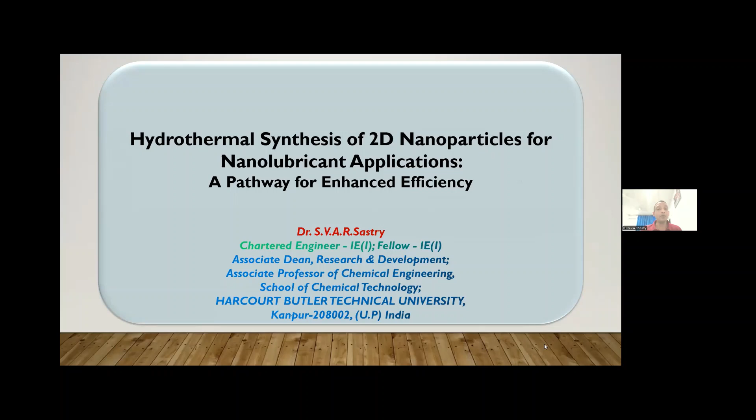So the topic of my presentation is hydrothermal synthesis of two-dimensional nanoparticles for nanolubricant applications, a pathway for enhanced efficiency. So why nanolubricants at all?

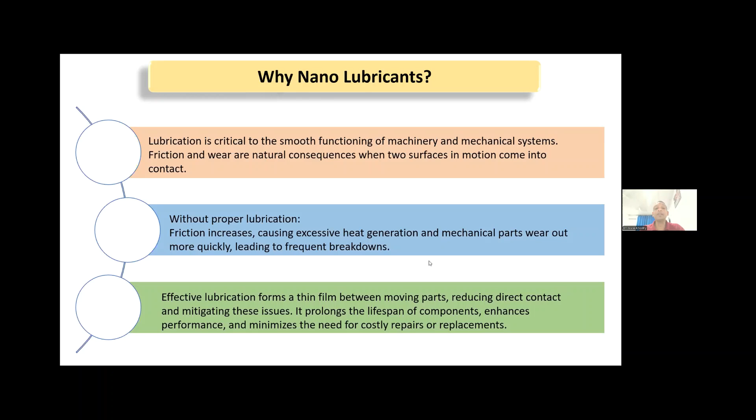Lubrication is critical to the smooth functioning of machinery and mechanical systems. Friction and wear are natural consequences when two surfaces in motion come in contact. Without proper lubrication, friction increases, causing excessive heat generation, and mechanical parts wear out more quickly, causing breakdowns. Effective lubrication forms a thin film that prolongs the lifespan of the components.

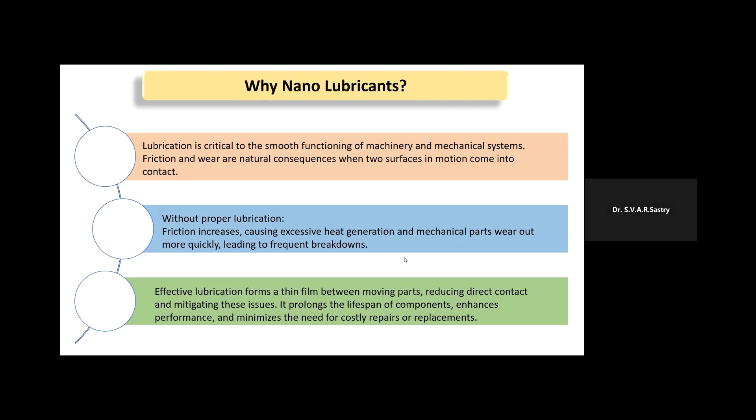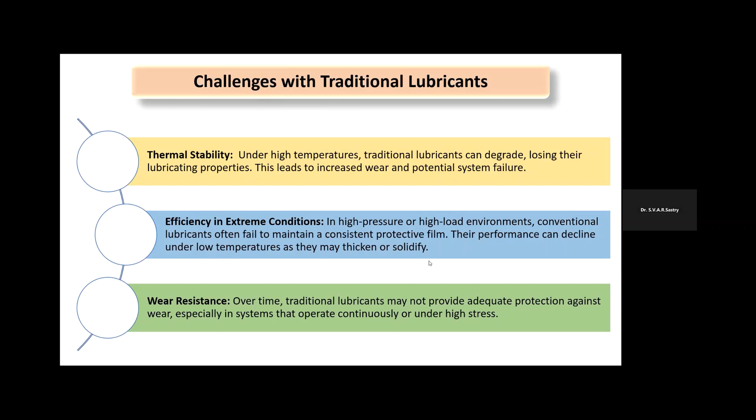The third challenge is wear resistance. It is seen that over time, traditional lubricants may not provide adequate protection against wear, especially in systems that operate continuously under high stress.

To overcome these limitations and challenges, we can have nanolubricants, which is a next generation lubrication technology. We can have enhanced thermal stability because nanoparticles present in the lubricants can withstand higher temperatures without degrading, maintaining the lubricant's performance in extreme heat. They can also dissipate heat more effectively, reducing the risk of overheating in the engine.

They also have superior anti-wear properties because they can create a protective layer on the surface, minimizing direct metal-to-metal contact, which reduces wear and prolongs the life of machine parts. The third advantage is friction reduction, wherein they act as tiny ball bearings, reducing friction between moving parts, leading to smoother operation and lower energy consumption.

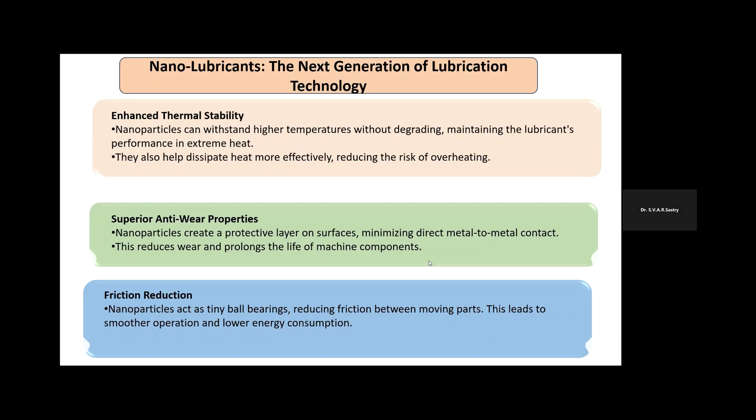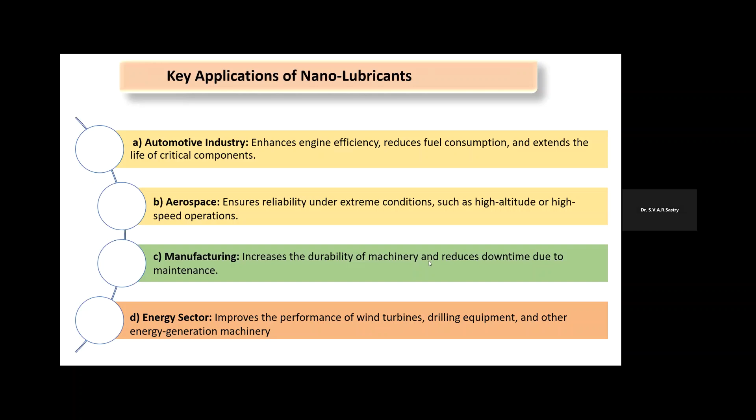Let's see the key applications of nanolubricants. It's seen that almost every industry, including the automobile industry, requires the use of nanolubricants for effective performance. So we have automotive, aerospace, manufacturing, energy sector, etc.

Let's see the comparison between conventional lubricants and nanolubricants, in terms of properties. First, thermal stability: conventional lubricants are moderate in thermal stability and degrade at higher temperatures, whereas nanolubricants have high thermal stability and are stable even at extreme temperatures.

Wear resistance is limited for conventional lubricants, whereas for nanolubricants it is superior. Friction reduction is adequate in conventional lubricants, whereas in nanolubricants it is excellent and also minimizes energy loss. In extreme conditions, efficiency declines for conventional lubricants, whereas nanolubricant efficiency is consistent in all conditions. The last property is environmental impact.

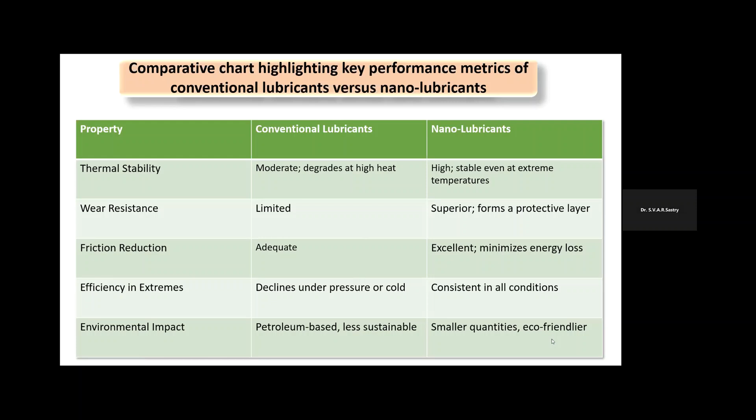Conventional lubricants, being based on petroleum-based feedstock, have a higher environmental impact and are less sustainable. Whereas nanolubricants can be used in lesser quantities and can also be made from biodegradable biological resources like castor oil and neem oil, which are non-edible oils, making them environmentally friendly. So how do we synthesize nanolubricants and add two-dimensional nanoparticles, and which method should we take into account?

Hydrothermal synthesis, or the hydrothermal method, for synthesizing nanoparticles is found to be the best method as of now, which can be used to make the nanoparticles, and then the nanoparticles can be added as additives in the lubricants. So to make the nanoparticles, we have these steps to be done.

First is precursor selection: we can select metal salts, either sulfates, nitrates, or oxides, used as precursors. Then we prepare a solution - the precursors are dissolved in water or a mixture of solvents, often under basic or acidic conditions, depending on the desired product. Then we seal it in an autoclave.

The solution is then transferred to a Teflon-lined autoclave and sealed. The autoclave ensures a pressurized environment, typically at a temperature between 120 degrees Celsius to 250 degrees Celsius.

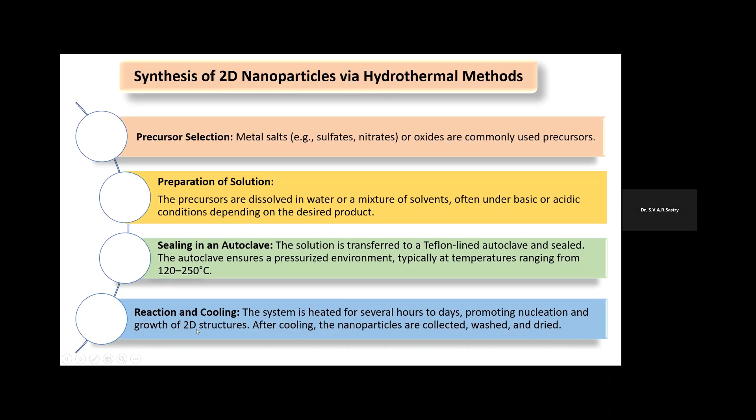Then the next step is reaction and cooling. The system is heated for several hours or several days, depending on the type of nanoparticles to be made, promoting nucleation and growth of two-dimensional nanoparticles in the autoclave. After cooling, the nanoparticles are collected, washed, and dried.

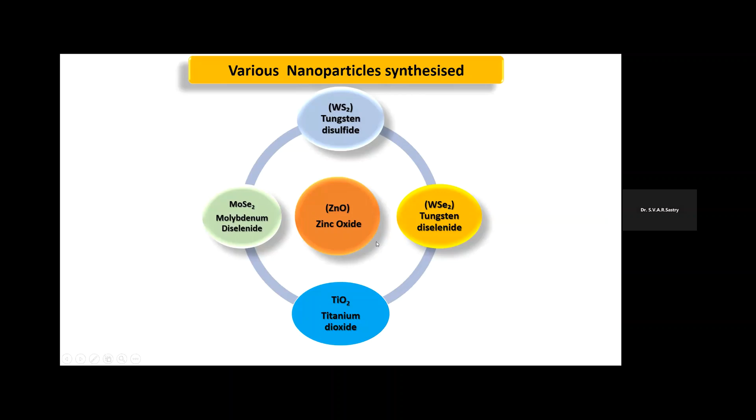We have made 5 different types of nanoparticles using this method, and all 5 are used in making nanolubricants. The first is titanium dioxide. Then we have molybdenum diselenide, tungsten disulfide, tungsten diselenide, and zinc oxide. All 5 have shown good performance in engines.

Let's see the hydrothermal synthesis method for synthesizing two-dimensional nanoparticles: preparation of precursors, then transferring to a Teflon-lined autoclave, then the autoclave is heated at a temperature between 100 to 250 or 300 degrees Celsius in a vacuum oven.

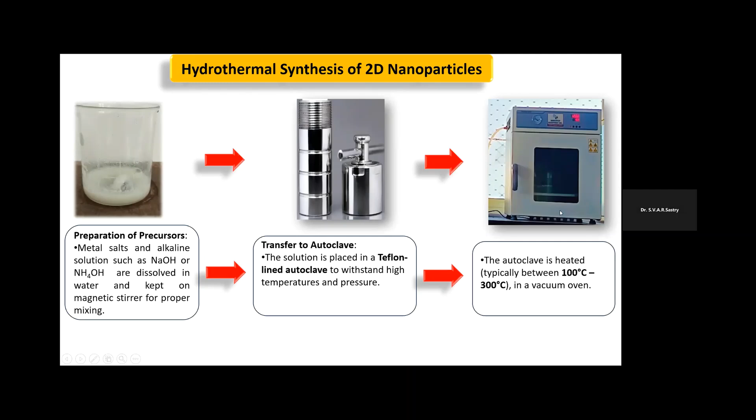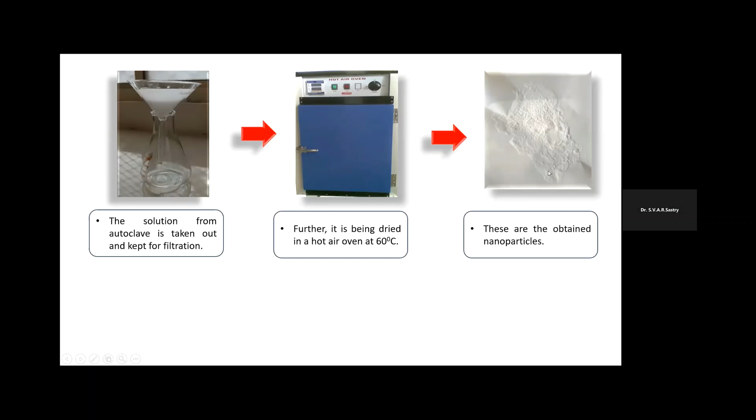Then the solution coming from that is transferred, kept for filtration. It is further dried in a hot air oven at 60 degrees Celsius. And then finally, we have this white powder obtained as nanoparticles. This is zinc oxide.

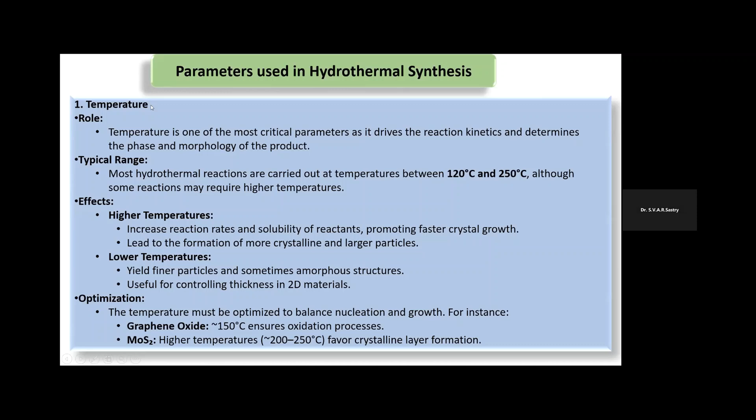So what are the parameters used to control the hydrothermal synthesis method? The first and most important parameter is temperature. It is one of the most critical parameters, driving the kinetics of the reaction and determining the phase and morphology of the product formed. The typical range is between 120 to 250 degrees Celsius, although some nanoparticle synthesis may require higher temperatures. Higher temperatures increase the reaction rates and the solubility of reactants, promoting faster crystal growth.

In the autoclave, higher temperature also leads to the formation of more crystalline and larger particles, whereas lower temperature gives finer particles and sometimes amorphous structures, useful for controlling thickness in two-dimensional materials. So higher temperatures give more crystalline materials, and lower temperatures give more amorphous materials. We have to optimize the temperature to balance nucleation and growth.

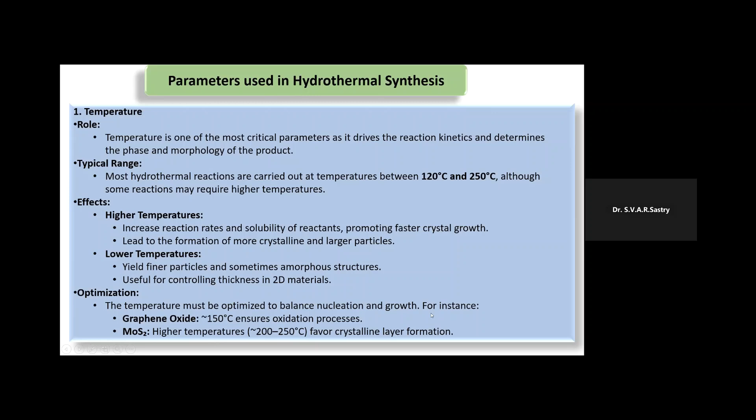For example, if you want to make graphene oxide nanoparticles, it is recommended to have a temperature of 150 degrees Celsius to ensure good oxidation. Similarly, if you want to use molybdenum disulfide, higher temperatures are required, between 200 to 250 Celsius, to have good crystalline layer formation.

The next parameter used in the hydrothermal synthesis mechanism is pressure. Pressure is typically auto-generated in the closed autoclave. It enables reactions at temperatures above the boiling point of the solvent, and the typical range of pressure is between 1 megapascal to 10 megapascals, depending on the solvent's vapor pressure at the reaction temperature.

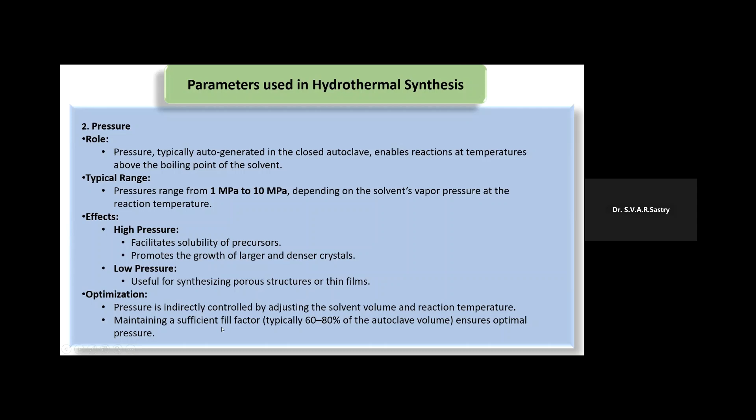The effects of pressure: high pressure facilitates the solubility of the precursors easily and promotes the growth of larger and denser crystals, whereas lower pressure is useful for synthesizing porous structures or thin films. Optimization is required again. Pressure is indirectly controlled by adjusting the solvent volume and the reaction temperature, maintaining a sufficient fill factor, typically between 60 to 80% of autoclave volume, to ensure optimal pressure.

The third parameter is reaction time. It dictates how long the reactants are subjected to the high temperature and high pressure environment. The typical range is between 6 to 72 hours, depending on the material we want to synthesize nanoparticles of. Long reaction time enables complete crystallization and the growth of larger nanoparticles, useful for production of defect-free structures.

Shorter reaction times give smaller particles or intermediate phases like clusters, favoring rapid nucleation over crystal growth, useful for size control as well. So again we had to optimize. It is observed that molybdenum disulfide nanosheets require around 24 hours, whereas zinc oxide nanocrystals can form within 6 to 12 hours. Depending on different types of materials, we have different optimal times.

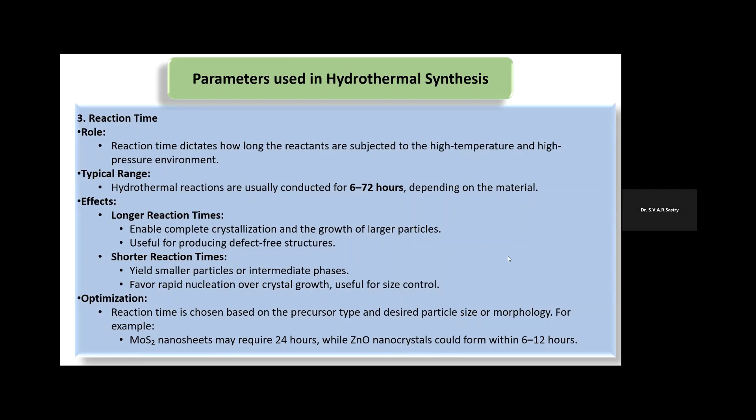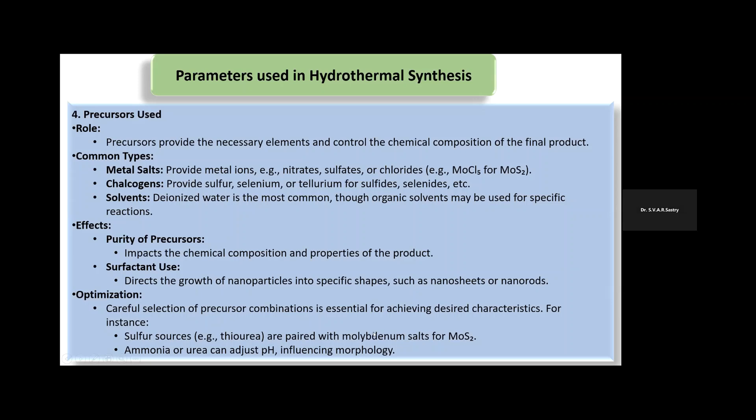As discussed before, there are different types of nanoparticles: zero-dimensional, one-dimensional, two-dimensional. For the application of nano lubricants, we prefer two-dimensional nanoparticles. To have two-dimensional nanoparticle morphology in the autoclave, we require the use of surfactant, and again optimization is key. For example, a sulfur source like thiourea can be paired with molybdenum salt for making MoS2 nanoparticles. Similarly, we can use ammonia or urea to adjust the pH, which can also influence the morphology of the final nanoparticles. So these were the 4 different parameters which can control the reaction in the autoclave.

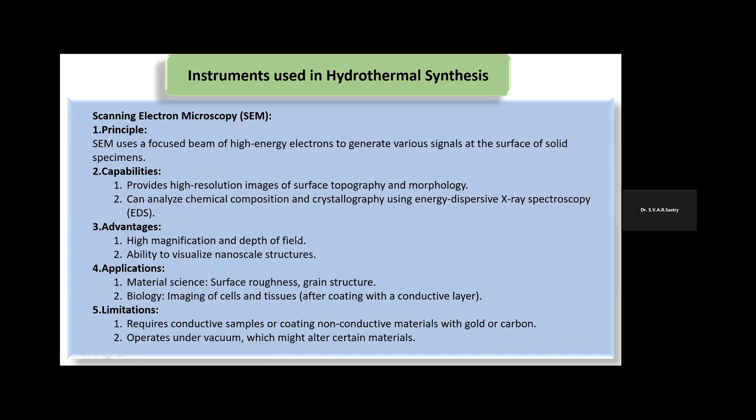Now we come to the instruments used to characterize the nanoparticles formed from hydrothermal synthesis. This will move forward quickly since it's just a description of the instruments. First is SEM, scanning electron microscope; using field emission SEM gives added advantage. Then TEM, transmission electron microscope, then X-ray diffraction and Raman spectroscopy. These 4 methods can be used to characterize the nanoparticles.

So then let's see the synthesis of nanoparticles using this hydrothermal method individually, starting with zinc oxide nanoparticles.

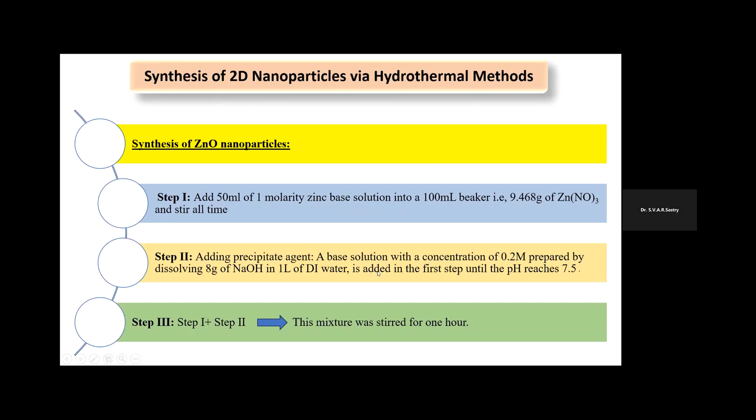We added 50 ml of 1 molarity zinc-based solution. Zinc nitrate was taken, then it was precipitated, and the mixture was stirred. Then we used hydrothermal processes for synthesis of nanoparticles, keeping a temperature of 120 degrees Celsius for a period of around 4 hours.

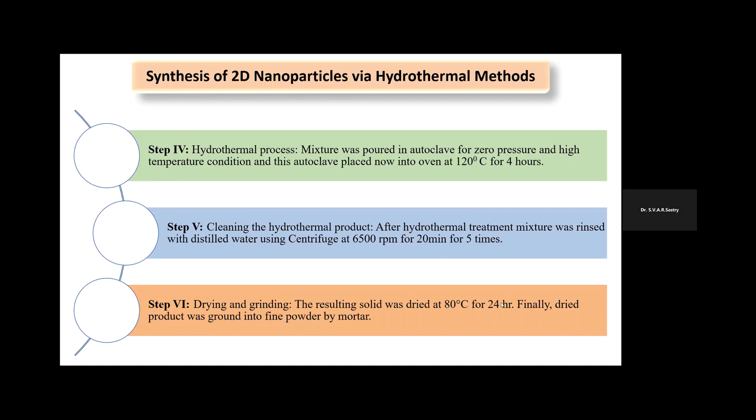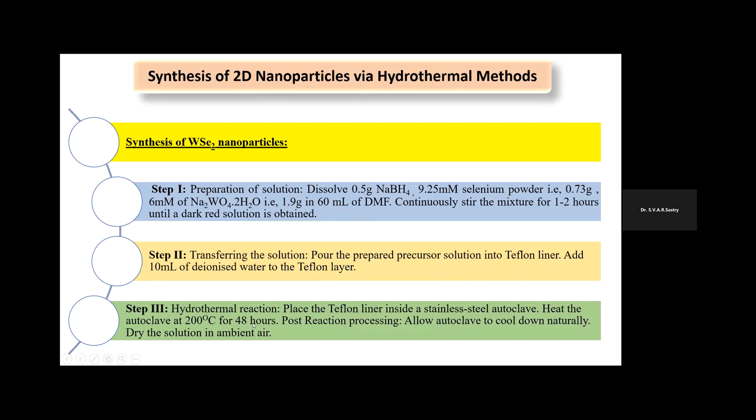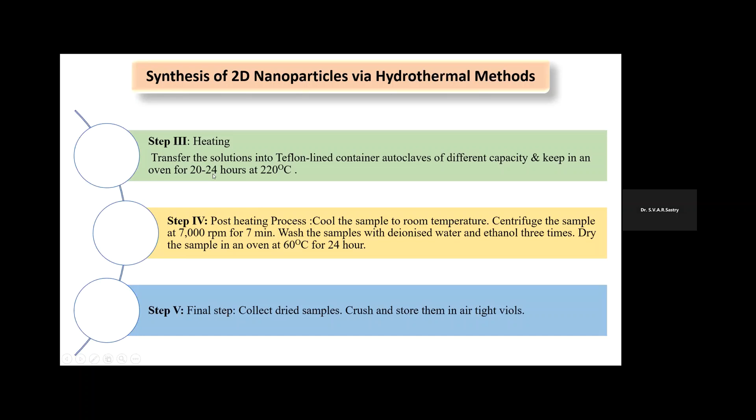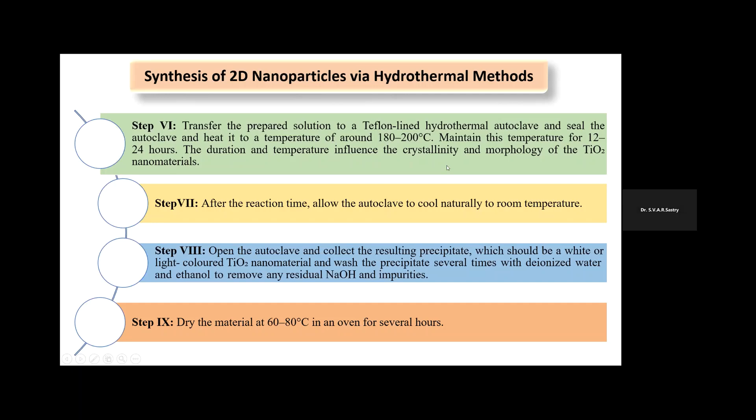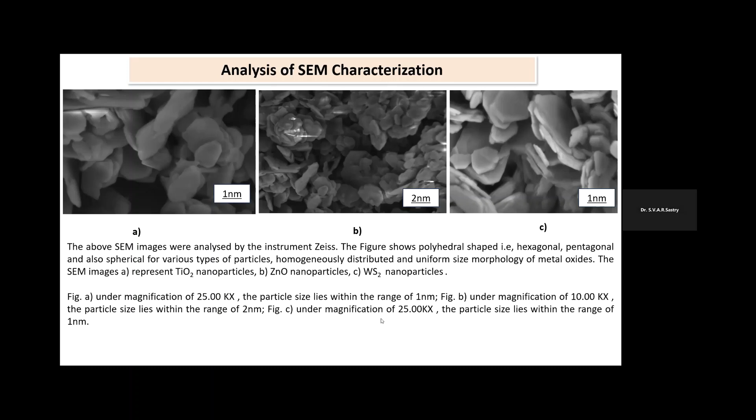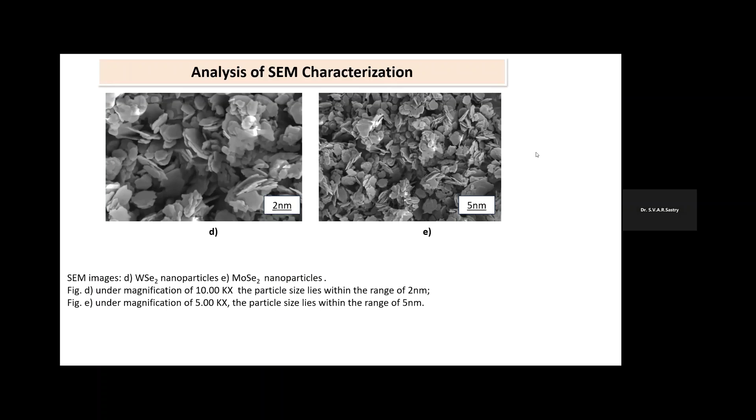Now let's see the advantages of hydrothermal synthesis method. We see that it gives controlled size and morphology, good temperature and pressure regulation. We can fine tune, and accordingly get good growth rates of the nanoparticles formed, and also control the size of the particles.

Higher temperatures typically promote faster crystallization, while controlled cooling can also help to achieve specific shapes like nanosheets or platelets. So the role of surfactants and templates cannot be underestimated.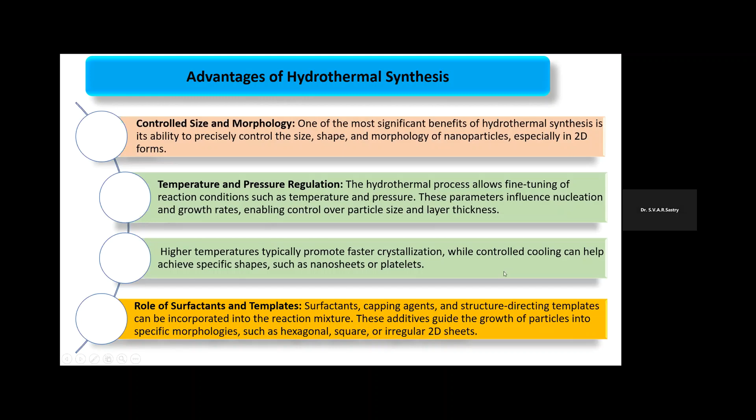Surfactants, capping agents, and structure directing templates can be incorporated into the reaction mixture initially, before adding to the autoclave. These additives can guide the growth of nanoparticles into specific morphologies like hexagonal, square, or irregular two-dimensional sheets, etc. Further, we can also have a homogeneous growth environment inside the autoclave using the hydrothermal synthesis method.

We see that the sealed and pressurized environment in the hydrothermal synthesis system ensures uniform conditions throughout the solution, and this also prevents uneven growth, so the yield of particles has consistent shape and size.

We also have reduced agglomeration, because once the particles get agglomerated, we don't have nano size anymore - it goes to 10^-7 or 10^-6 meters size, but we want nanoparticles. Agglomeration also causes problems later when we mix this in lubricants as an additive, as it will not mix uniformly and will interfere with engine performance. So therefore, we don't want any agglomeration.

This hydrothermal synthesis method minimizes agglomeration due to the liquid phase synthesis method, producing well dispersed and distinct nanoparticles, which is critical for two-dimensional materials, where individual layers must remain separate for optimal performance in lubrication.

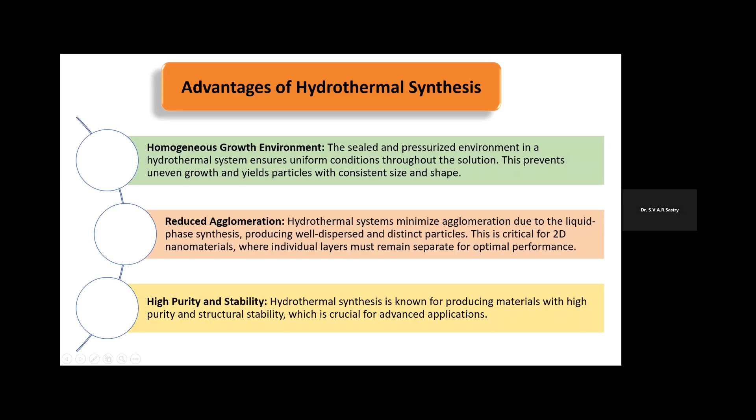In addition, we also have high purity and stability of the finally formed nanoparticles. Hydrothermal synthesis is known for producing materials with high purity and structural stability. Further, we have minimal contamination because the system is closed - the autoclave is sealed. This closed reaction system minimizes exposure to external environment and contaminants like dust or air impurities, ensuring a clean synthesis environment.

Further, the use of pure precursors as raw materials and reactants, and controlled reaction pathways, also enhances chemical purity, because we don't have any side reactions or undesired reactions here.

Then we also have selective crystallization. Under high temperature and pressure conditions, only certain crystalline phases are favored. This selectivity reduces the likelihood of forming unwanted byproducts or amorphous phases. As we saw before, with temperature and pressure as parameters, high temperature and high pressure gives crystalline nanoparticle formation, while lower temperature and lower pressure gives amorphous nanoparticle formation.

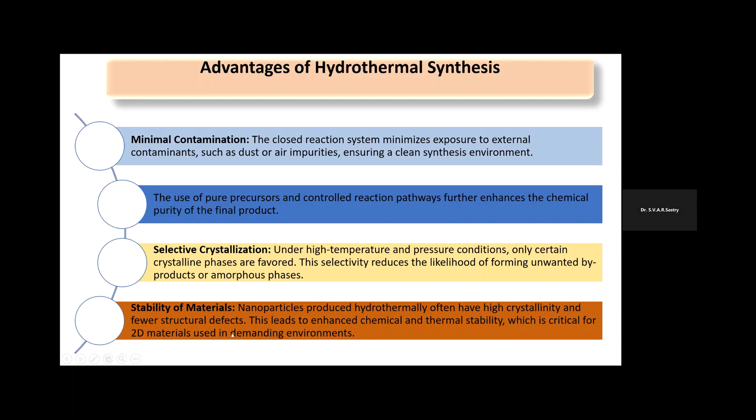So that also we can control, and we can have crystalline nanoparticles coming out. Then stability of the materials. Nanoparticles produced by this method often have high crystallinity and lesser structural defects, leading to enhanced chemical and thermal stability, which is very critical for use of two-dimensional nanoparticles in the demanding environments of high temperature and high pressure environments of the lubricants.

Then morphology and size distribution of the nanoparticles synthesized by the hydrothermal synthesis method. This method allows for the synthesis of nanoparticles with well-defined tunable shapes like spherical, rod-like, or plate-like morphologies. Factors like temperature, pressure, and the type of precursors used can influence the final morphology or the product form. Controlled crystallization growth rates in hydrothermal synthesis often result in high crystallinity and uniformity in the structure.

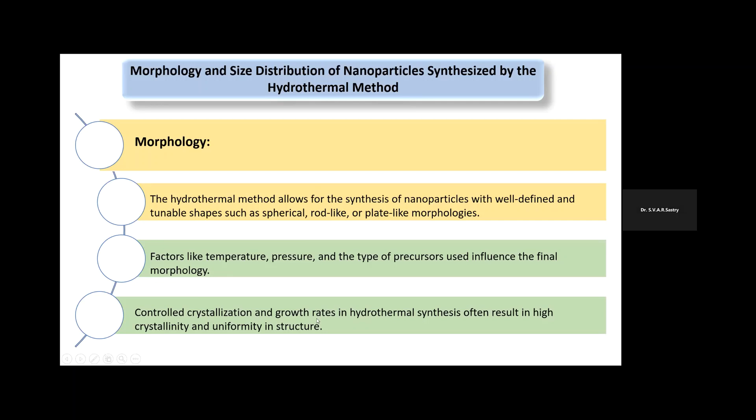Coming to size distribution, the particles synthesized through this method have a good size distribution, very narrow range, because we have already controlled very precisely the reaction conditions. The adjustable parameters like reaction time and precursor concentration can fine-tune the particle size, which usually ranges from a few nanometers to a few hundred nanometers.

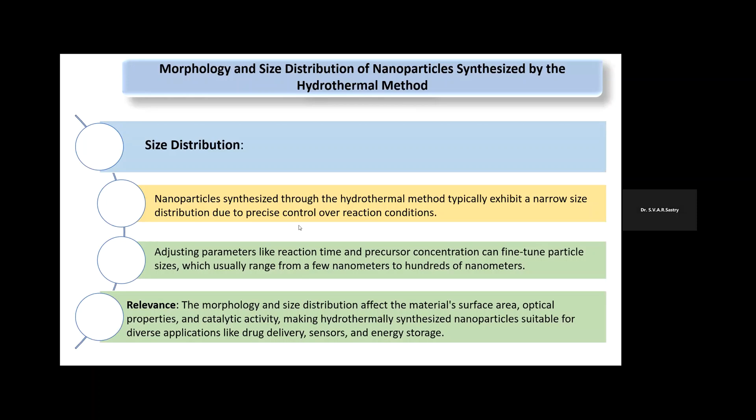Then coming to surface roughness and chemical composition of the materials, we see that the surface texture of the hydrothermally synthesized nanoparticles is influenced by factors like temperature, pH, and the growth inhibitors used during the synthesis. The hydrothermal synthesis method can give smooth or textured surface depending on the crystallization process, which is very, very important for the lubrication application especially.

How? Because if the nanoparticles formed have roughness in the surface, then during engine performance and operation, this will corrode, this will collide with the engine, and it also hampers the life or decreases the life of the engine. Therefore, you want smooth nanoparticles. So this is also ensured in this method.

Then chemical composition. The hydrothermal method allows for precise control over the material's chemical composition, enabling the incorporation of dopants or modifications at a later stage as the need arises. The high pressure, high temperature conditions often result in pure phase and stoichiometrically accurate materials.

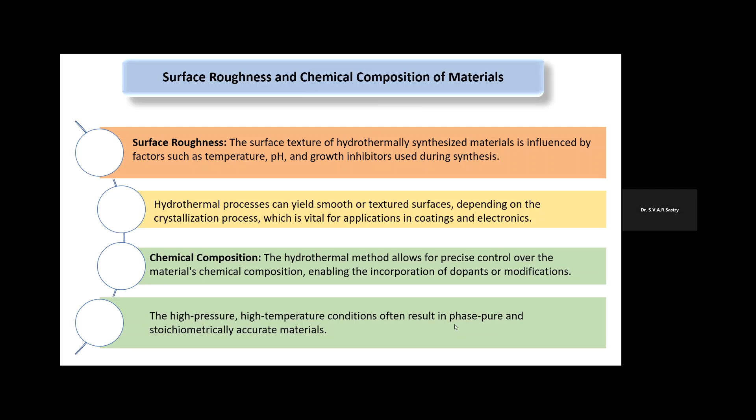So now coming to, we have synthesized the nanoparticles for the lubricant additions. Let's see how the lubricant properties can be enhanced by using these nanoparticles. So we have reduction in the friction coefficients. Lubricants reduce the direct contact between the surfaces by forming a film, minimizing the mechanical interlocking and adhesive forces, and this reduces the shear force needed to slide the surfaces against each other. So key factors for lubricants are viscosity and the use of additives, especially friction modifiers, which can reduce the sliding resistance.

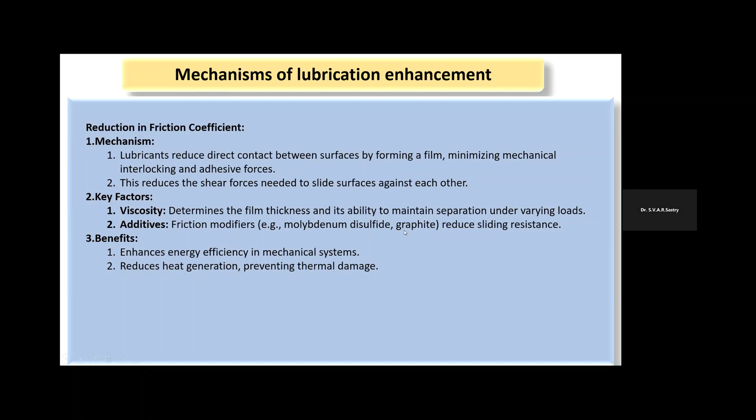Formation of protective tribofilms in the lubricating application. Tribofilms are thin solid layers formed in situ during operation, during the sliding or rolling contact, due to the chemical reaction between lubricant and the surface materials. These tribofilms act as a barrier, protecting the underlying surface from wear and oxidation. The key features of these tribofilms: they are self-repairing, they continuously form under active tribological conditions, and they often consist of oxides, nitrides, or other reaction products.

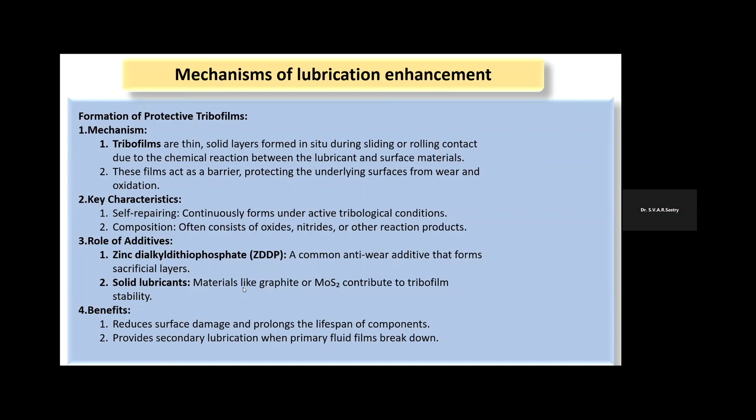We can also use additives like zinc dialkyl dithiophosphate, which can be used as an anti-wear additive, forming sacrificial layers during lubricant operation. Similarly, you can also use solid lubricants where materials like graphite or MoS2 can contribute to tribofilm stability. It also lowers the wear rate, increases performance under extreme pressure and high temperature, and enhances load carrying capacity.

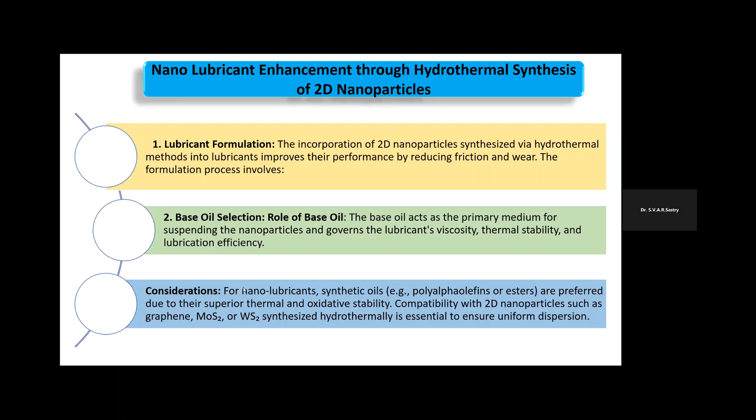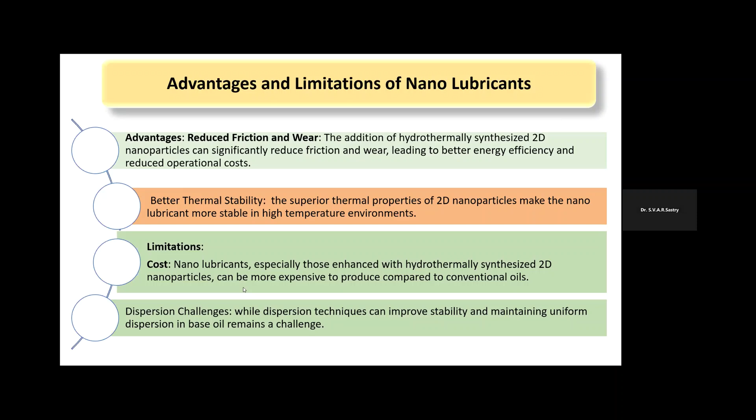However, we have one challenge, that is in terms of dispersion. While dispersion techniques can improve stability, maintaining uniform dispersion in base oil remains a challenge. So to disperse, we can use an ultrasonicator to have uniform dispersion, and also we should ensure that this dispersion remains stable at extreme conditions of temperature and pressure.